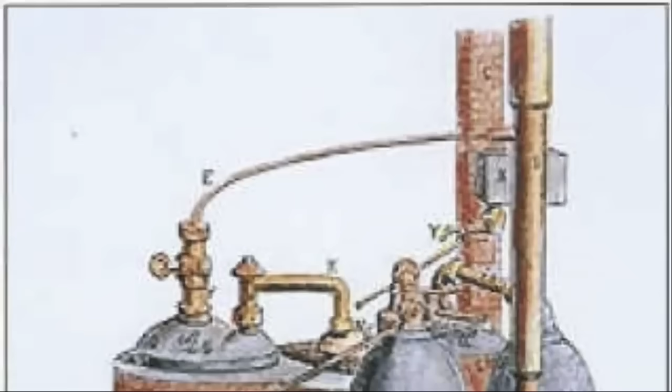The first commercial steam-powered device is generally considered to be Thomas Savery's steam pump, which he invented in 1698. In 1702, Savery wrote of an engine which will raise as much water as two horses working together at one time in such a work can do. By 1712, Thomas Newcomen had created a steam engine that could transmit continuous power. Both of these early designs were primarily used to pump water from mines.

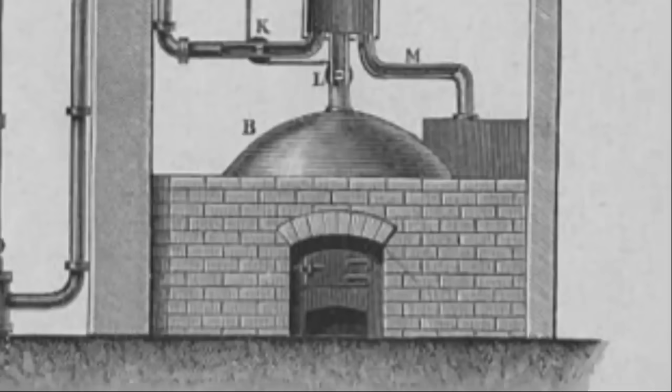The Newcomen engine was significantly more powerful and replaced a team of 500 horses that had been used to pump water out of a mine. It would take decades, however, for these machines to be considerably improved. In 1759, the Newcomen engine came to the attention of James Watt, a Scottish inventor and mechanical engineer who had made a living fixing and making scientific and musical instruments in Glasgow, Scotland.

Watt was born in 1736, and though sickly as a child, showed an aptitude for math. He learned to repair and make instruments like sextants, compasses, and barometers. He found employment at the University of Glasgow. He also started a business building musical instruments and toys.

There is a popular story that Watt was inspired to investigate steam after seeing a kettle boil and steam lift the kettle's lid. The story has been told in a variety of forms, none of which are probably strictly true. Still, while he was not inspired by a boiling kettle, he did conduct many laboratory experiments that did include the use of a kettle to create steam. Watt came to understand the rules of thermodynamics, a field that would not be formalized for another century.

A friend seems to have brought the steam engine to his attention when he suggested that a steam engine could be used to drive a wagon, replacing horses. It was in repairing a University of Glasgow model Newcomen engine in 1763 or 1764, however, that he came upon a better system that could significantly increase the engine's efficiency.

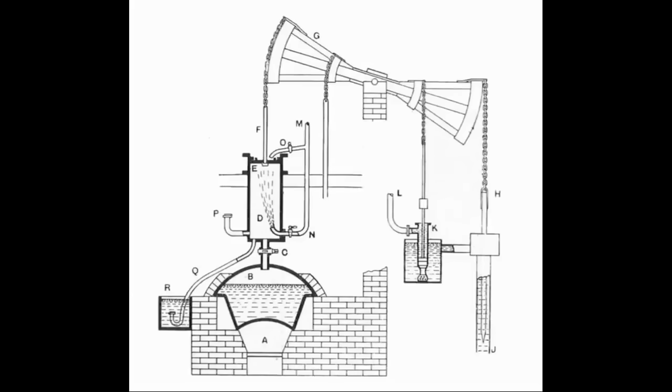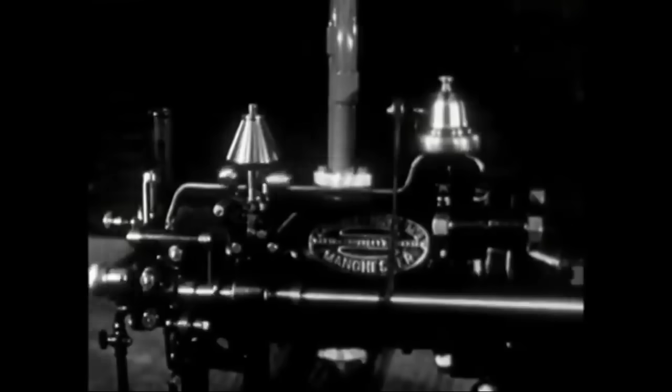The Newcomen engine had a single piston that was alternately heated and then cooled, which wasted a significant portion of the machine's potential. His innovation was to add a separate chamber he called a condenser, in which steam could condense, which massively improved efficiency. Later, he was also able to make another significant innovation by using a sun and planet gear system to allow his engines to make rotary motions, allowing steam engines to spin wheels.

Despite his talent for inventing, it took him years to realize any financial gain from his work. His research left him in near poverty, and he spent years in the 1760s borrowing money and working as a civil engineer. At one point, he so despaired of success that he wrote, "Of all things in life, there is nothing more foolish than inventing, and probably the majority of inventors have been led to the same opinion by their own experiences."

By 1768, he had created working models, and in 1769 he received a patent for a newly invented method of lessening the consumption of steam and fuel in fire engines. Also, in 1768, he met with Matthew Boulton, owner of a manufacturing company and leader in the English Enlightenment movement. Boulton had had little formal schooling, but he had become successful as a businessman and scientist anyway, corresponding with Benjamin Franklin and Charles Darwin's grandfather. He bought an interest in the patent, and Watt continued his work.

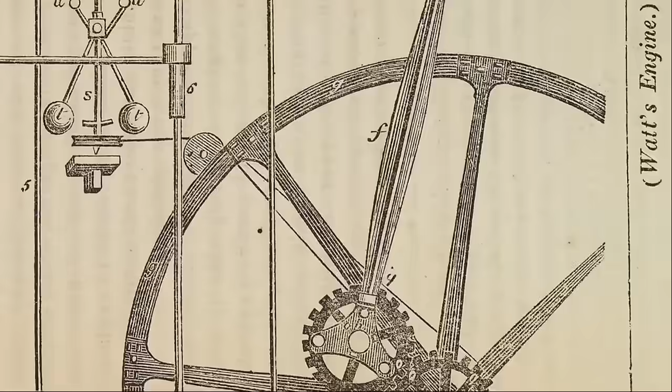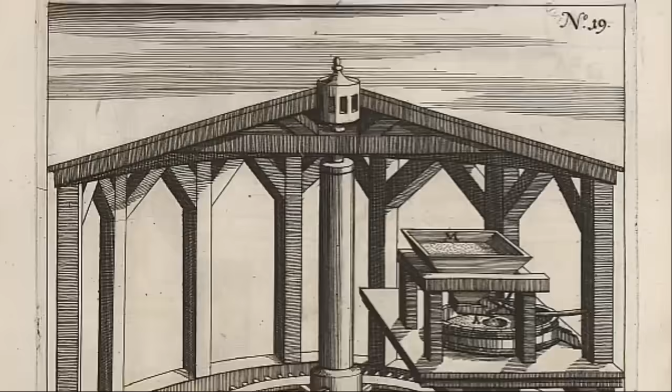Watt was able to introduce his engines commercially in 1776 and agreed to be paid for the machines by taking royalties on 1/3 of customer savings compared to the coal cost of running the Newcomen engines. While this was a profitable system, it didn't work with customers who did not already have steam engines and who used horses instead. Horses were widely used for all kinds of power in the 18th century and earlier, not just for plowing fields and pulling wagons.

Mills, where grain is ground into flour, were important to create bread, a staple food for European society, as well as in creating malt powder for use in brewing. Wind, water, and oxen have all been used to turn mills and grind grain, but the most effective means of running a mill by the late 18th century was the horse.

Samuel Whitbread ran a successful brewery in London and had 6 horses that walked ceaselessly in circles to power the mill. He may have had as many as 20 horses for the mill, which were switched out to keep the mill working at peak efficiency.

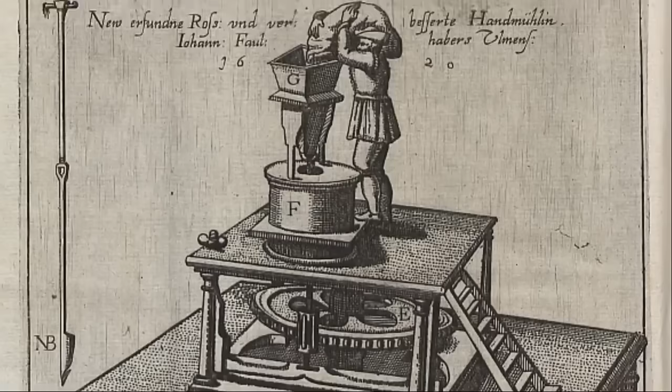It isn't 100% clear how Watt eventually came up with the number that would define horsepower. In one version, Watt, watching horses like Whitbread's, observed them to complete about 144 circuits in an hour, about 2.4 times a minute. He determined that the horses pushed the shafts of the mill with a force of about 180 pounds. Using a complicated formula, he determined that a horse could produce

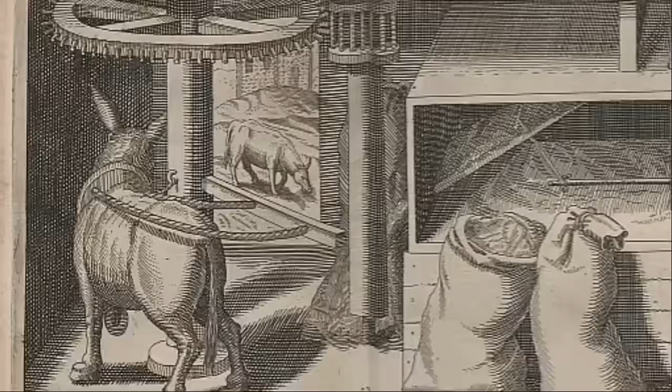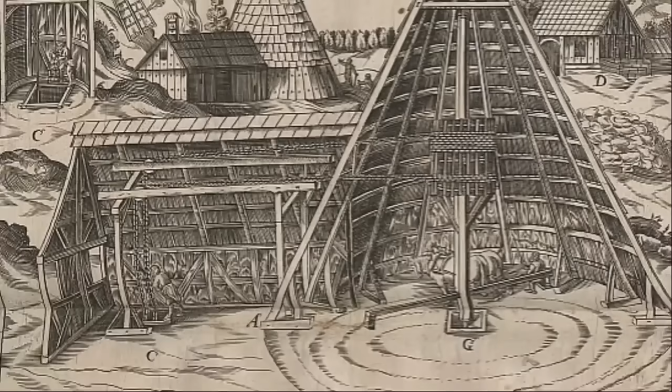32,572 foot-pounds a minute, where a foot-pound is the amount of force it takes to raise a pound a foot in the air. Others had come up with different numbers, but Watt standardized his version of horsepower at 33,000 foot-pounds per minute. That might sound like complete nonsense, but it can be visualized. Imagine a single horse raising a 33-pound bucket from the bottom of a 1,000-foot deep well in 1 minute. The energy it takes to raise that bucket is 1 horsepower.

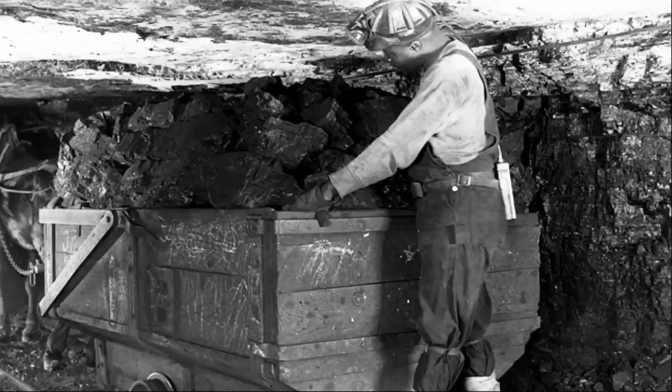One version attributes his calculations to watching the work of pit ponies, which worked to raise coal from mines. He guessed they could lift an average of 220-pound force 100 feet a minute, and he estimated that a full horse would be at least 50% stronger, coming up with a number similar to the 32,572 foot-pounds in a minute of the earlier tale, which was then standardized at 33,000 foot-pounds per minute. Watt may have done both estimations before standardizing the measure, but however he came up with it, his estimation was a tour de force of marketing.

A popular legend for how he came up with this number is that he was challenged by a brewer to build a steam engine that could match the work of a horse. The brewer established the amount by putting his strongest horse to work for 8 hours, driving him all the time to the limit of his endurance.

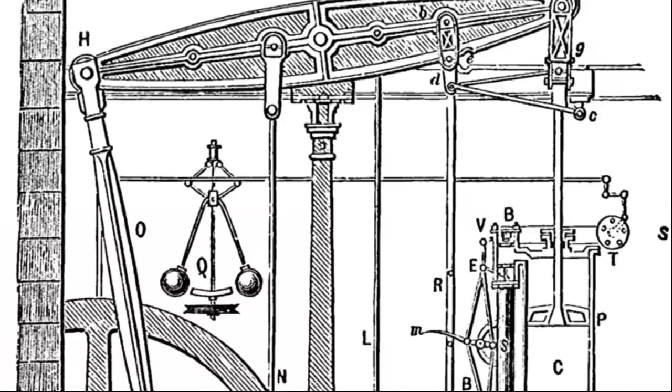Popular Mechanics in 1912 said the 30,000 foot-pounds, that is the amount of force necessary to lift a 30,000-pound weight 1 foot in 1 minute, produced by the horse, exceeds by nearly 1/3 the work capacity of an average horse. But Watt made his engine produce at least 33,000 foot-pounds and dubbed the value a horsepower. This story is likely apocryphal, but it does fairly accurately represent Watt's marketing strategy.

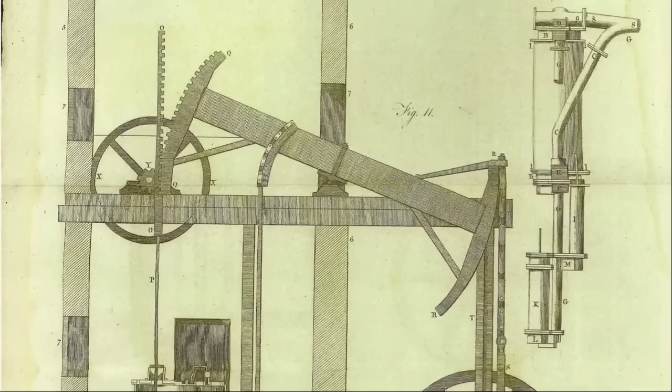He told Whitbread that his engines could harness the power of 200 horses at once without having to store or feed the animals. Whitbread took the bait, and within a year it increased production from 90,000 barrels to 143,000. The replacement of horses and mills with steam engines was a turning point in the Industrial Revolution. Earlier steam engines like Newcomen's pump were limited in where and how they could be produced, but Watt's engines could be used nearly anywhere, thus providing an immense source of power to countless industries and massively increasing human production.

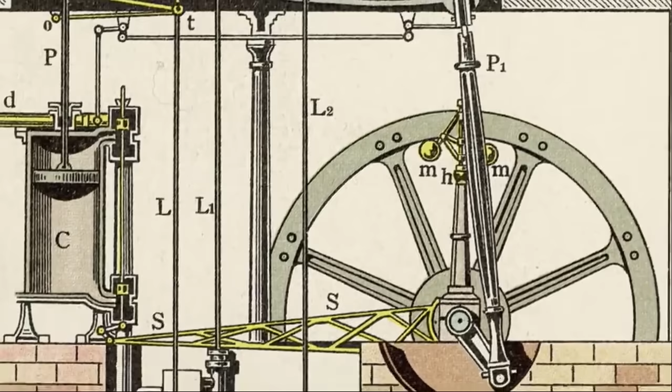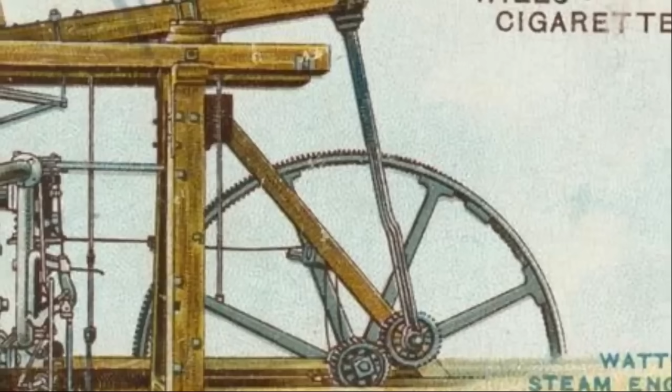The engine installed in Whitbread's brewery on Chiswell Street was installed in 1785, only the second steam engine installed in a brewery. It could produce around 35 horsepower, and it helped Whitbread become the largest brewer in the country. In addition to Watt's success in naming the horsepower, King George III and Queen Charlotte visited the brewery and the machine on May 24, 1787.

Astoundingly, that steam engine still exists, even though it's moved far from its original home. It was only actually decommissioned in 1887, 102 years after its installation. Archibald Liversidge, an English chemist and a trustee at what was then called the Technological, Industrial and Sanitary Museum in Sydney, Australia, intervened before the engine could be scrapped and had it donated to the museum. The museum, which is now called the Powerhouse Museum, still displays the engine. It is the oldest surviving rotative steam engine still in existence.

Watt's steam engine and his work with Boulton catapulted him into an internationally famed inventor. His patent made him a wealthy man and allowed him to play a significant part in England's technological revolution. He created a number of other inventions, including a portable copying machine. In the 1790s, some of his clients stopped paying him as other separate condenser steam engines came to market, and they thought that his patent would be impossible to defend, so he spent considerable time in court fighting other inventors.

He retired in 1800, built a magnificent house he called the Heathfield, and spent the last years of his life tinkering with inventions like a machine for copying sculptures and traveling the world. He died on August 25, 1819.

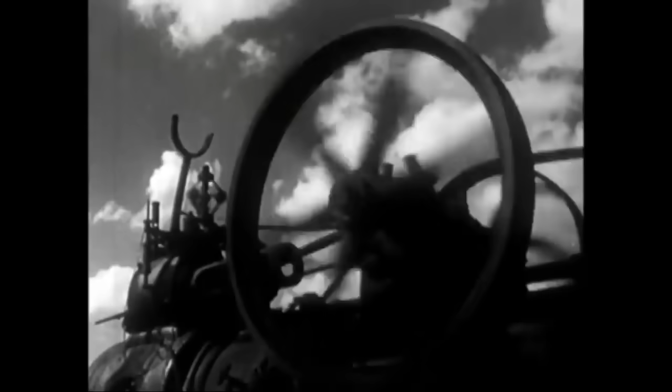His inventions and improvements on the steam engine were epoch-changing, providing a significant foundation for further inventions, and he has a claim to being one of the fathers of the industrial age, as his work helped power many of the innovations that transformed the world over the 19th century.

In 1882, Charles William Siemens first suggested using the name watt to apply to a unit of power. It's now familiar to many as the output of a very different invention, the light bulb. Despite his somewhat imprecise measurement of horsepower, the term caught on, becoming a standard way of talking about the output of power of engines throughout the 19th century.

There are actually differing measurements for a horsepower as well. A mechanical horsepower is the number familiar to many in the US and elsewhere. It uses the standard measurement and the output and performance of vehicle engines. But there's also a metric horsepower which differs slightly. While mechanical horsepower is the equivalent to about 745 watts, a metric horsepower is equal to about 735.

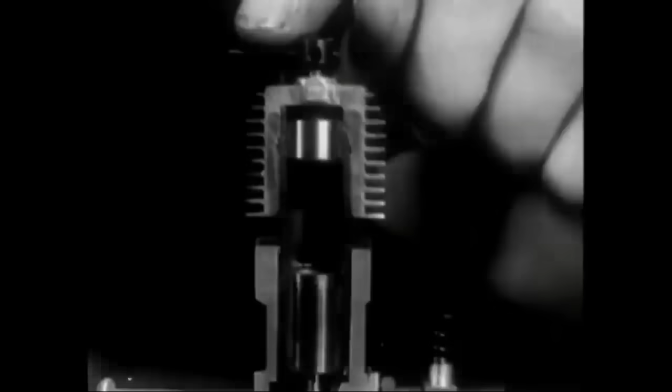Of course, now we are pretty far removed from a time when a horse was the most recognizable symbol of working power. But we can be reminded of those early days every time we work with something that has an engine, from cars to lawnmowers. James Watt had an enormous impact on the world when he developed his engine, and that impact would have been important even if he'd never come up with the stroke of marketing genius of that term, horsepower. And yet, come up with that stroke of genius, he did.

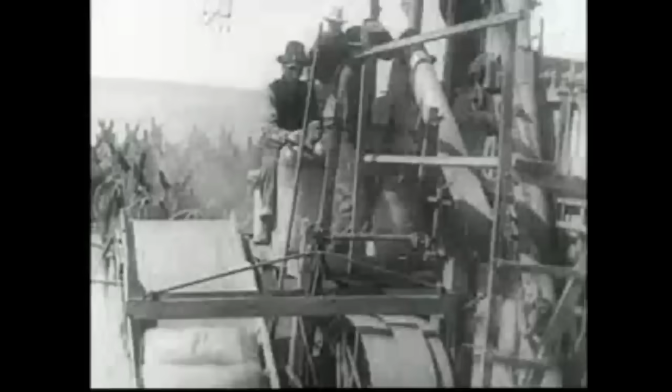The term became so standard that the very first advertisement for a Model T boasted that the car has 20 horsepower. It's also interesting to note that while the number of horsepower given for most vehicles reflects peak horsepower, most horses can produce much more than 1 horsepower for brief periods. A 1993 study, based on measurements made in 1926, found that the horse's peak power reached as high as 14.9 horsepower, but that for sustained activity, a rate of about 1 horsepower fits with how 18th and 19th century people used horses.

For James Watt, the engine that he built and the term that he coined created a legacy that lasted far beyond his lifespan and is still visible today. All you have to do to see it is to, well, pop the hood. His statue in Westminster Abbey has an epitaph which says that Watt enlarged the resources of his country, increased the power of man, and rose to an eminent spot among the most illustrious followers of science and real benefactors of the world.

The word plastic is derived from the Greek word for to form or shape. And the term really predates the stuff that we call modern plastics. It's been used as early as the 16th century to refer to any compound that was, say, moldable or shapeable. But it is a particularly apt term for modern plastics, which can apparently be shaped into almost anything, and because of that have been shaped into, well, almost everything.

We have a very mixed relationship with plastic. The term itself has come to mean fake or cheap, and plastic trash in the environment has become an issue of international concern. But plastic is so related to our modern life, so pervasive, that plastic is practically the definition of modernity. And that material, which can be shaped into almost everything, has shaped us as well, almost from the very beginning. The story of celluloid, the first man-made plastic, is history that deserves to be remembered.

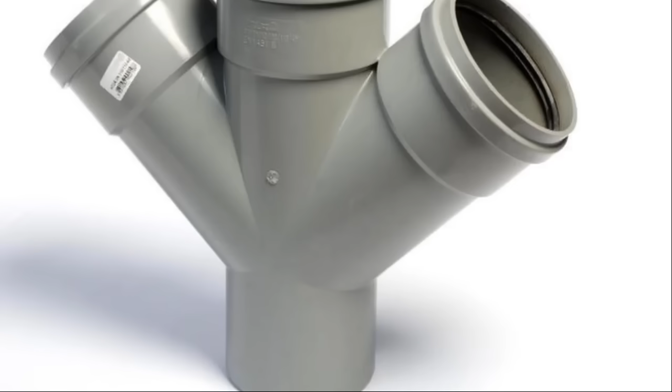Plasticity is a general property of materials that refers to the ability of that material to undergo deformation without breaking. Soil has plasticity, that's why you can leave a footprint. Metal has plasticity, that's why it can be bent. The materials we call plastics have such high plasticity, ability to form them into new shapes, that they become named after the ability. Plastic is moldable polymer.

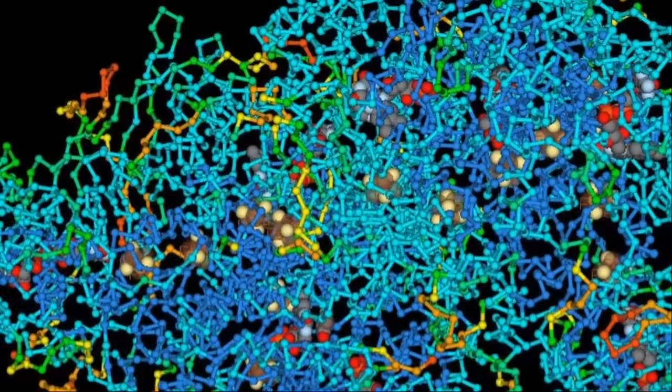While we think of plastic as the epitome of fake and not naturally derived, the building blocks of plastic are not just rooted in nature, they are fundamental to it. Polymers are so-called macromolecules, very large molecules made up of repeating chains of smaller molecules. The smaller molecules, called monomers, join together in a process called polymerization to create three-dimensional structures that can include thousands of molecules, for example, proteins.

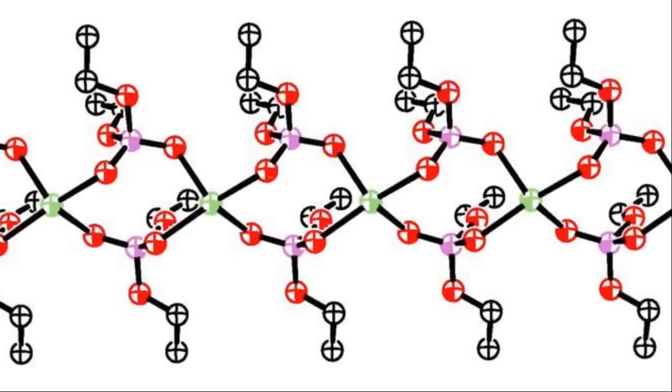Typically, though not exclusively, the backbone of polymers will be carbon, which is strong and stable and well suited to forming molecular bonds. Today we create many forms of artificial polymers, but natural polymers, biopolymers, are central to life itself.

Polynucleotides are polymers—that's the stuff we call DNA. These large molecular masses, compared to smaller molecular compounds, exhibit certain characteristics. They tend to be tough, having an ability to absorb energy by plastically deforming rather than fracturing. They tend to form glass or semicrystalline structures rather than crystals. They also tend toward viscoelasticity, showing characteristics of both viscosity and elasticity—roughly, the ability to deform under pressure and yet return to an original form.

To get the idea, natural rubber is a biopolymer, as are natural gums like chicle. So are wool, silk, and resins like amber and shellac. All of these biopolymers exhibit some characteristics of the stuff we today call plastic.

Humans have been using biopolymers in their natural form for a very long time. There's evidence that people have been chewing gum made of tree resin since the Stone Age. Mesoamericans were using natural tree rubber to make balls since at least the 2nd millennium BC. A process for making silk textiles was developed in China in the 4th millennium BC, and wool textiles date back to at least 1500 BC. There's written evidence of the use of shellac, a natural resin secreted by a bug that can be dissolved into liquid, reshaped, and hardened again, in the 1st millennium BC.

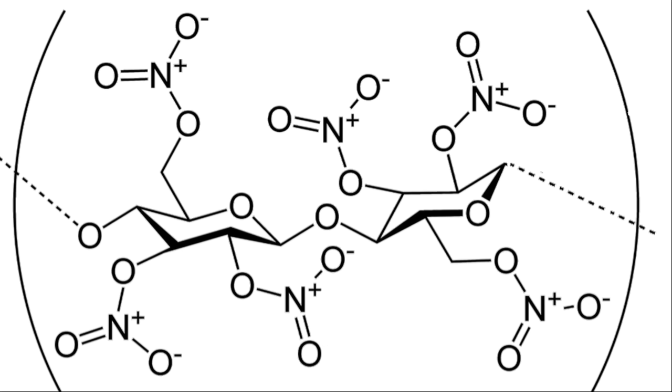Cellulose was also the foundation of the first man-made plastic. In the 1830s, it was discovered that cellulose could be nitrated—that is, have a chemical nitro group introduced into the compound—generally by mixing cellulose with nitric acid. The resulting compound, nitrocellulose, was highly combustible. Its first use was as an explosive, commonly called gun cotton.

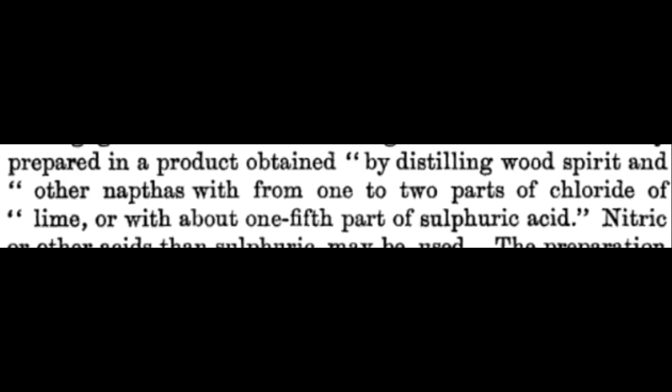Gun cotton can be very volatile, and the first attempts to manufacture it were abandoned because the factories tended to blow up. Gun cotton itself has an interesting history. A prolific inventor from Birmingham named Alexander Parkes found a unique use for it. Parks took gun cotton and dissolved it in various solvents, finding it turned into a viscous substance that could be poured into a mold. His first thought was to make waterproof cloth, but it turned out the compound, which he called Parkesine, could be molded into almost anything.

Parkes took out his first related patent in 1855. He later won a bronze medal for excellence of product at the International Exhibition in London in 1862, exhibiting things like buttons, handles for knives and razors, and decorative cases for daguerreotypes. Parkesine is generally recognized as the first man-made plastic.

But Parkesine didn't quite change the world. Parks tried to commercialize his product and formed a company in 1866. The problem was that Parks wanted to keep the price very low—the idea being that parksine could substitute for all manner of natural materials, with the advantage of being cheap to produce. But in trying to keep it cheap, he used substandard materials and wasn't able to manufacture items of the same quality produced for the Crystal Palace exposition. Parkesine turned out to be prone to cracking and highly flammable. His company folded in 1868.

What took Parks' invention to the next step was a shortage. The game of billiards likely derived from various lawn sports, and French King Louis XI had the first known indoor billiard table made in the 15th century. The sport became popular among the wealthy, and by the 18th century had become more common in places like Paris cafes. The balls could be made of wood or clay, but the wealthy preferred ivory.

The game had grown in popularity, and by the middle of the 19th century was popular enough in the United States—virtually every estate or mansion was expected to have a billiards table—that there was growing concern about the cost and availability of ivory to meet demand for billiard balls. A New York Times article in 1867 worried that 3,500 pachyderms had been sold from the island of Ceylon in just 3 years to make billiard balls. The paper worried the supply of animals might eventually be used up.

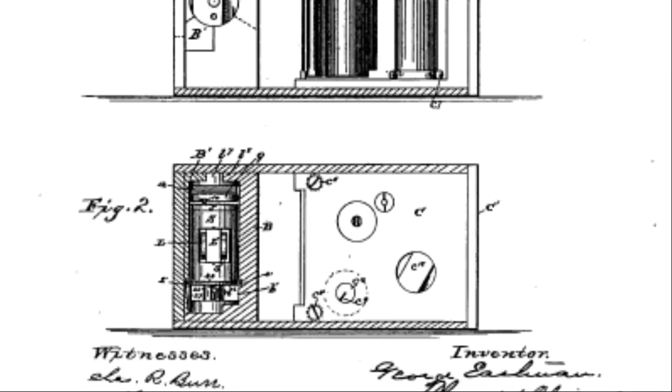At the same time, George Eastman developed a practical roll film to be used in personal cameras, creating the Eastman Kodak Company. Goodwin and Eastman would sue each other over patents, but celluloid had allowed both affordable personal photography and practical motion pictures. Both transformed culture in profound ways.

As an odd demonstration of the power of celluloid, in the 19-teens, early film star Irene Castle became so popular on film that her hairstyle, the short bob, became so popular that it caused a collapse in the market for one of celluloid's most popular products, the personal comb.

Facing a reduced market, one manufacturer of celluloid women's hair products shifted to a new line. Using the newly developed process of injection molding, Sam Foster started producing celluloid sunglasses, first from a Woolworth store on the boardwalk in Atlantic City under the brand name Foster Grant. The popularity of celluloid film drove the development of inexpensive celluloid sunglasses, which largely featured movie stars in their marketing.

The relationship between humanity and plastic is something that author Susan Freinkel describes as a toxic love affair. Celluloid created a revolution that led to the development of all sorts of different kinds of plastics to make virtually everything. And it's not just consumer items that we get from plastic.

It led to huge advancements in science and technology. Could we have ever gone to the moon? Could we go to outer space if we didn't have plastic? And it allowed us to stop taking the things we need directly from nature. Elephants might be extinct today if it weren't for John Wesley Hyatt.

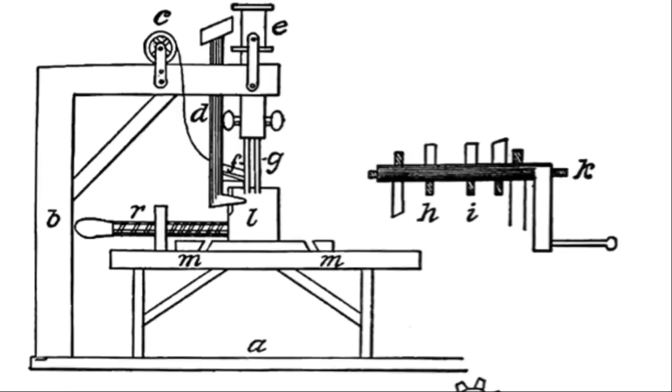But while needles have been a tool for humankind for millennia, a machine that can replicate the human motion of the needle is a relatively new invention. The first design for a sewing machine is generally accepted to be in 1790, when Thomas Saint, a cabinet maker in England, designed and detailed a machine intended for use on leather and canvas.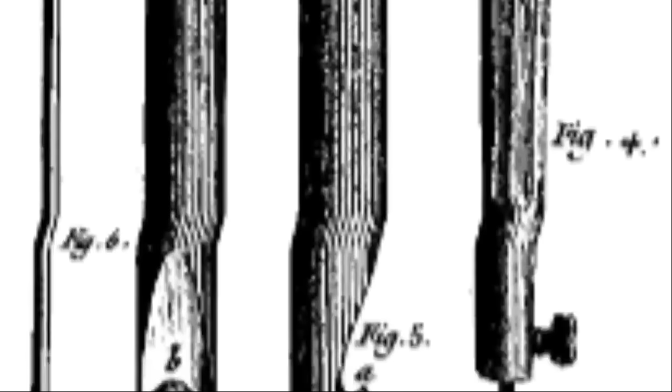The machine used a chain stitch, in which a series of loop stitches form a chain-like pattern. The process uses two points: a stitching awl that pierces the material, and a forked point rod that would carry the thread through the hole where it was hooked underneath.

But Saint never appeared to market his design. It was never produced or used in any large numbers. It's assumed that he probably had at least one working device, but no original examples exist. In 1874, an engineer was able to replicate the design using those original patent drawings.

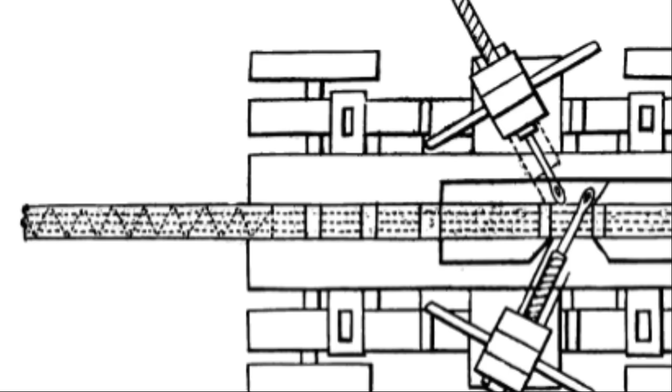While several machines were patented in the early part of the 19th century, either the designs failed or were not successfully marketed. Josef Madersperger, an Austrian tailor, was granted a patent in 1814 for a machine he created to recreate the motions of the human hand while sewing. He never marketed the design, and the patent expired three years later. He died in the poorhouse in Vienna, never having had any success.

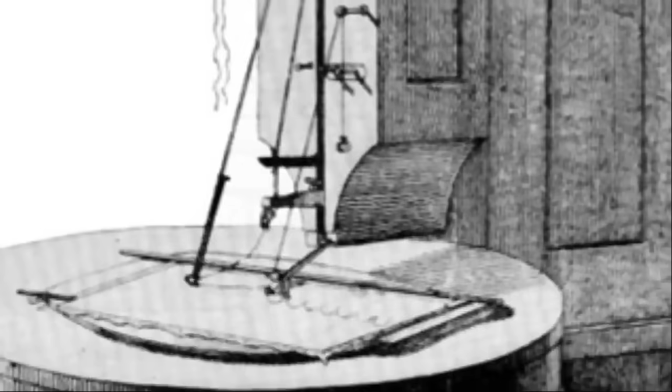The first practical machine to see wide-scale use was created in 1829 by a tailor named Barthélemy Thimonnier, who recruited Auguste Ferrand, an engineer, to help with patent drawings. Their patent was granted by the French government in July of 1830.

Thimonnier successfully negotiated a contract with France for the manufacture of army uniforms and opened the first machine-based sewing factory with 80 machines. However, his factory was burned in an act of arson, allegedly by a group of tailors who feared their jobs would be replaced by the invention. Thimonnier was inside when the fire began, but escaped with his life. But just as others before him, his machine never fully caught on, and he died in poverty.

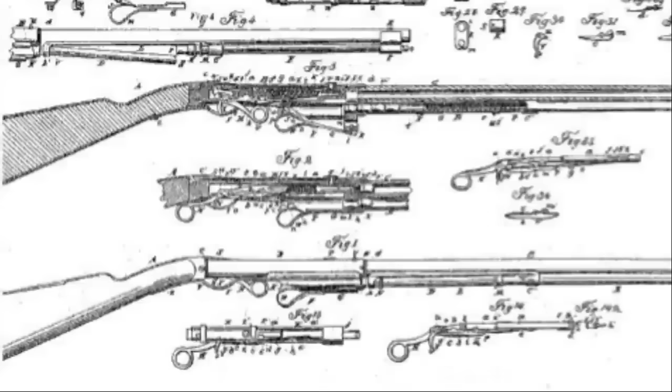In 1832, an American mechanic and inventor named Walter Hunt devised a working sewing machine, but concerned with the welfare and success of seamstresses and tailors, decided against filing the patent. Hunt did, however, go on to patent the safety pin, the fountain pen, a streetcar bell, a coal-fired stove, an ice boat, an ice plow, a street sweeping machine, and an early repeating rifle design.

But it wasn't until 1844 that all these elements came together to create a truly practical machine, and that came from Englishman John Fisher, who in 1844 patented a machine for making lace that was very much like one created by Isaac Singer in 1851. Importantly, though, while Fisher's device earned a patent, that patent was apparently either lost or misfiled by the Patent Office.

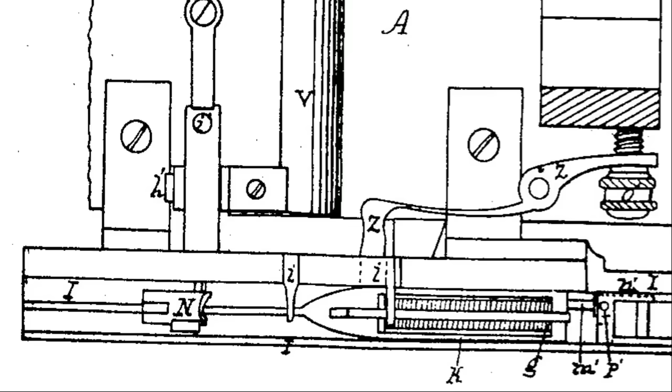Next was Elias Howe Jr. in Massachusetts. He had been an apprentice in a textile factory and later in the shop of a master mechanic, where he latched onto the concept of making a sewing machine. In 1846, his machine was the first to be patented with a lock-stitch design and a needle with an eye at the point, powered by a hand crank.

Howe spent a great deal of money on improvements and marketing, but after failing to find investors in the United States, his brother marketed the machine in London. There, William Thomas, a factory owner, purchased one for £250. Howe then traveled to London to further design in conjunction with Thomas, but after business disagreements and the failing health of his wife, returned to the United States.

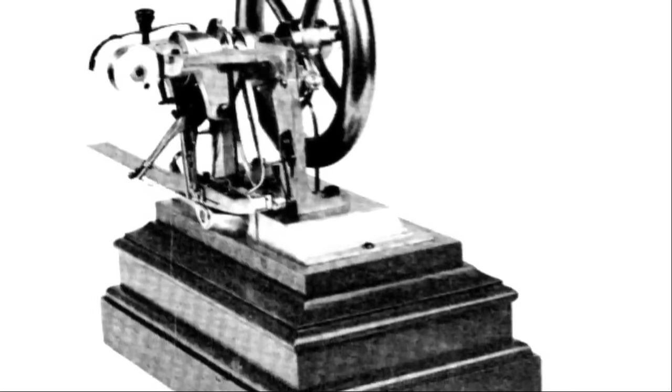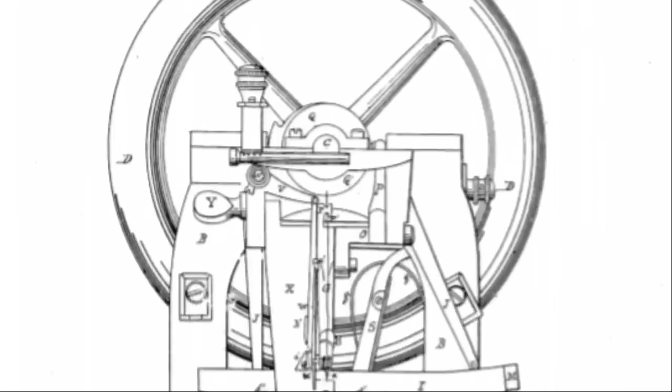He was penniless, not even able to afford the steerage to get home. On board the ship, he served as cook to earn his way, and soon afterwards became a widower. It was learned that the sewing machine had proliferated with various patents for minor differences, but he was unable to afford the court cases in defense of his own patent.

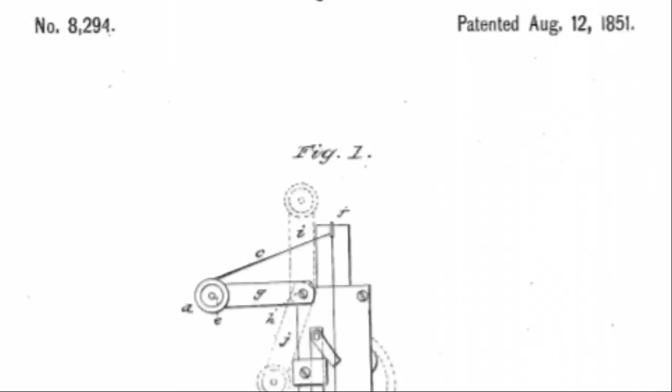Shortly after the death of Howe's wife, an American inventor named Isaac Singer was working in a machine shop in Boston where sewing machines designed by a pair named Blodgett and Lerow were being repaired. The shop owner asked Singer if he could improve the machine because it was cumbersome to make and utilize. Singer's improvements—a straight needle instead of a curved one, and a linear shuttle instead of a circular one—were memorialized in his patent number 8294 in August of 1851.

But it was about this time that Howe started borrowing money from friends and family in order to pursue court cases against all the companies manufacturing machines in violation of his patent, including Singer. Singer tried to argue that Howe's design was not original because Walter Hunt had invented the machine previous to that, but since Hunt had never filed for his patent, Howe won the dispute and earned the right to royalties on all lock-stitch machines that used eye-pointed needles.

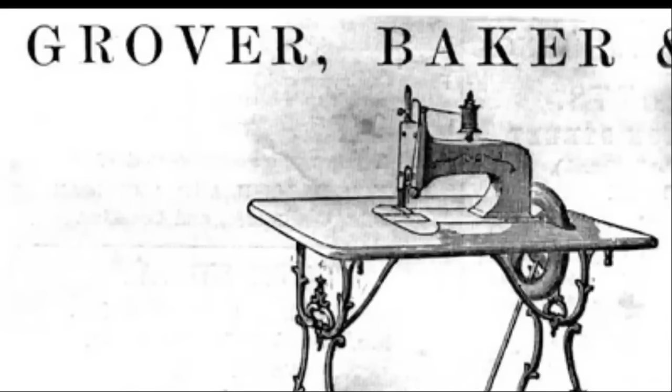Originally, the royalties were $25 per machine. With the sewing machine adapting and improving so rapidly, many other patent holders pursued legal cases in what has often been called the sewing machine war. In October of 1856, the president of one sewing machine company, Grover and Baker, proposed a sort of legal truce.

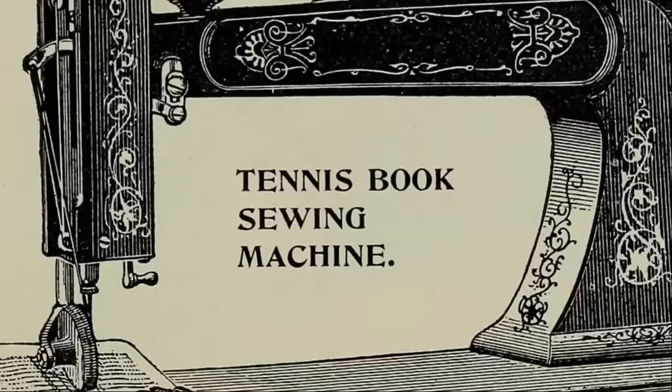He worked with several manufacturers, including Singer, Wheeler and Wilson, and Elias Howe, to form the Sewing Machine Combination, or Sewing Machine Trust. The group pooled their patents and agreed to share the profits, with Howe getting a reduced royalty of $5 per machine sold in the United States and $1 for every machine sold abroad. This agreement allowed manufacturers to concentrate on production and sales, not legal action.

It ended in 1877, when the last patent expired. Because Howe was paid per machine, his royalty records allow us to know just how quickly sewing machine production grew. In 1853, Wheeler and Wilson produced just shy of 800 machines. By 1859, the number was 21,000, with the total for the 7 years being almost 34,000 sewing machines. Singer produced slightly more than 800 machines in 1853, and about 11,000 in 1859, with a 7-year total of over 23,000. In 1860, 110,000 machines were made in the United States.

In 1860, the New York Times chimed, 'Such are some of the important results accomplished by the sewing machines, these Lilliputian needle women that never become weary while performing the labor of human fingers. Every day extends their use into remoter parts of the country and of the world. They are used in China, in Hindustan, Australia, Turkey, Africa, South America, and throughout Europe. In fact, everywhere that busy needle is plied, these tireless workers have found their way, carrying relief for women's trembling hands and weary eyes. The swift-flying needle, the best boon to a woman in the 19th century, has already won many victories, and soon the song of the shirt will be heard only in tradition of sufferings passed away.'

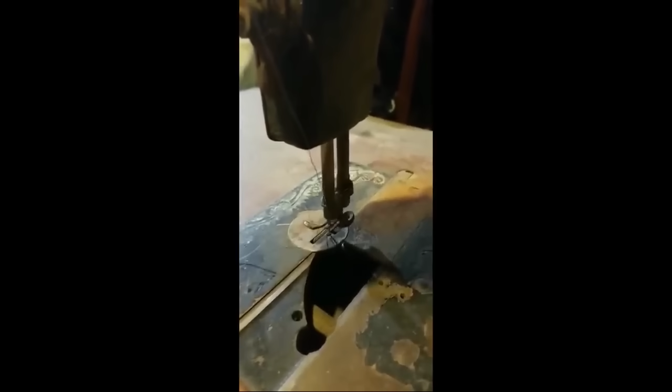But in all this growth, one company stood out and is still a household name today. Singer, despite having to pay royalties, built a flourishing business. He invested in mass production with interchangeable parts, making his machines less expensive to produce, and introduced a smaller machine intended for home use. Edward Clark, Singer's attorney and part owner of the company, launched the concept of installment payments, or hire purchase plans. This allowed the machine to be used for income while still paying off the purchase.

According to one article, Singer said, 'I don't care a damn for the invention. The dimes are what I'm after.' And he made many dimes. At the time of his death in 1875, his company was one of the first American-based companies to be multinational and was profiting some $22 million a year. According to American Science and Invention, Singer was the first to spend more than $1 million on advertising. The company's website currently claims that it produced the first practical sewing machine and that by 1890, the company had 90% of the global market share.

Isaac Singer and Elias Howe both died multimillionaires, and the sewing machine went on to impact society in other ways. Firstly, the industrialized garment industry allowed for cheaper clothing, allowing the purchase of new clothing instead of repairing worn ones. This freed up time otherwise spent creating or maintaining a family's clothing. Prior to sewing machines, the amount of time it took an experienced seamstress to create a gentleman's dress shirt by hand was 14 hours. A frock coat would take 16, and a pair of pantaloons took 5. With a sewing machine, the time was drastically reduced to between 1 and 3 hours per item.

The change allowed women to seek employment outside the home. The machine also transformed industry. More clothing could be produced more cheaply, and the increased income for more workers increased demand. The garment industry grew, along with ancillary industries like growing cotton, manufacturing machines and parts, and department stores to sell the products. With the new industry, however, came new challenges of industrialization.

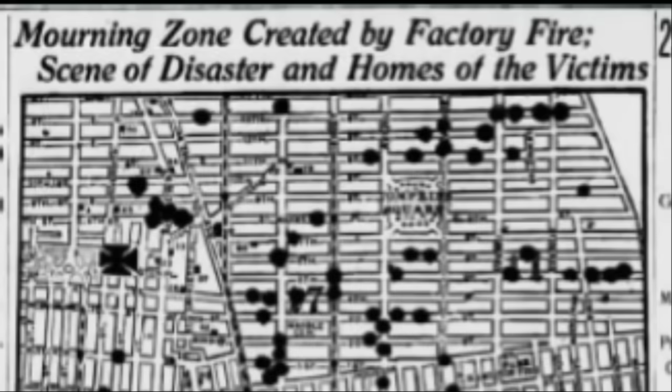Adding insult to injury, the exits were locked to prevent employees from sneaking breaks or stealing clothing. The managers could check purses since all employees exited through one set of doors. And with the fire blocking the only open stairwell, many resorted to jumping from the windows to escape the flames. The death toll that day was 146 garment workers, only 23 of whom were men.

The tragedy of that day led to many legislative reforms and creation of new organizations. The American Society of Safety Professionals was formed to help create industry standards for occupational safety and health. New York State Legislature formed the Factory Investigating Commission to prevent hazards and loss of life. Their investigations led to the creation of 38 new labor laws in New York.

The impact of the invention of the sewing machine was truly profound. It changed economies, it changed industries, it changed women's roles in industry, it changed the way that we regulate industry, but it also powerfully impacted culture. Things like department stores and advertising and consumer culture were powerfully impacted by sewing machines, which were among the first industrialized items to be marketed directly towards women.

The introduction of electric sewing machines, which were first available in 1889 but became much more available after the First World War, was part of what spurred the demand to have electricity in homes. With factories spewing out clothing, fashions changed much more quickly, and clothing didn't have to last as long, and new stores were created or stores were transformed. Entire industries were transformed in order to showcase those fashions.

In other industries, like interior design, think about things like drapes or furniture, or the interior of automobiles were also revolutionized by the invention. According to Time magazine, Mahatma Gandhi, who was a man famous for simplicity, said that the sewing machine is one of the few useful things ever to have been invented.

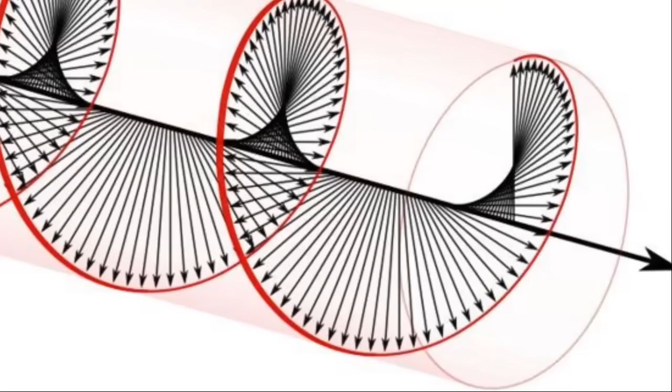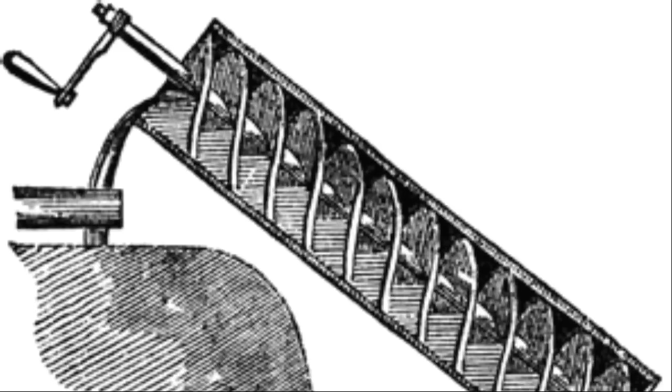The idea of the screw, that is an inclined plane that spirals around a central shaft, is ancient. The earliest known uses were a water pump that might have been invented in Assyria to irrigate the Hanging Gardens of Babylon, one of the 7 wonders of the ancient world, in the first millennium BC. The device was in use in Egypt at least by the 3rd century BC, when the Greek mathematician and engineer Archimedes of Syracuse saw and described one. The device was later incorrectly attributed to Archimedes and is commonly called the Archimedes screw.

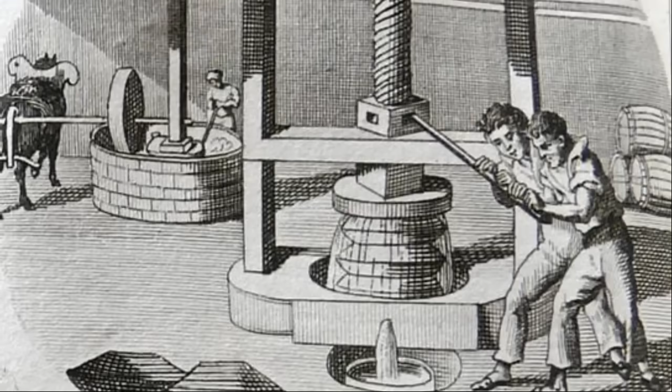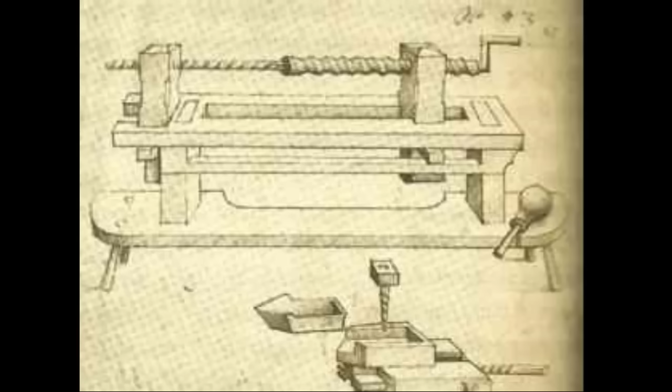Screws were also used, at least since the Hellenistic period, to drive presses for, say, pressing olive oil or pressing grapes for wine. But screws were not used as fasteners like we use them today. Without industrial methods, they simply would have been far too expensive to make. A number of other methods, including dovetails and dowels, were used in fastening, as well as, of course, the much more easily produced nail. Screws as fasteners were not apparently produced until around the 15th century. The earliest known mention is in a late 15th century manuscript.

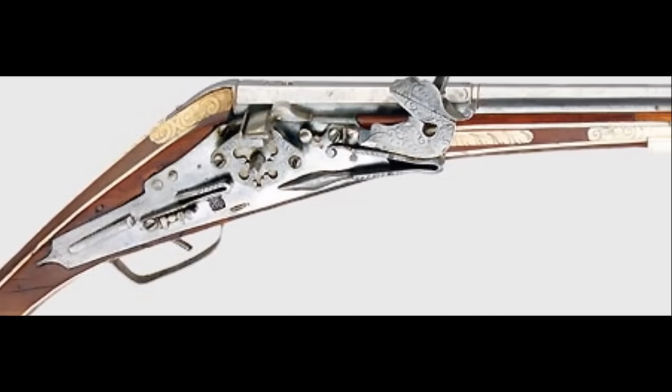Their initial use was as a fastener for parts of medieval jousting armor and, in nearly the same period, for early firearms. The wheel lock uses an internal spring to drive a piece of iron against a piece of pyrite to produce a spark to light the powder. The pyrite wore out quickly and so had to be replaced often, and a screw was thus used, since it could easily be screwed in and out.

The earliest screwdrivers were built to service these weapons, and they were called either a screw turner or a turn screw, and they had a pear-shaped wooden handle, and otherwise looked a lot like a modern flat-headed screwdriver. But these screws and screwdrivers would have been custom-made and used on very expensive devices like wheel locks and jousting armor, and so screws were not for the common folk.

In 1760, brothers Job and William Wyatt of Staffordshire patented a screw-making machine that used a file to cut in the threads following the pitch of a lead screw. This allowed mass production of screws and was a precursor to industrial mass production machines.

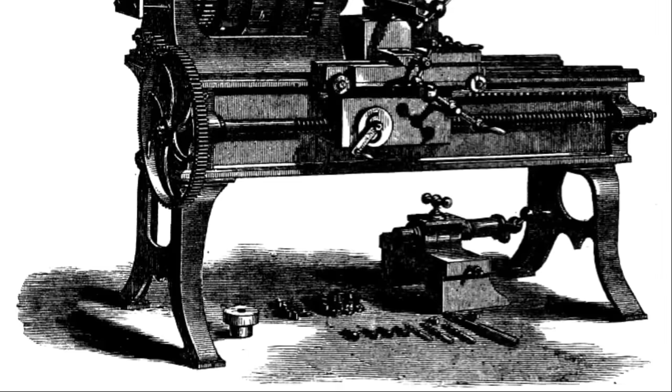The idea of using a lathe of some sort to cut threads was variously improved upon until a process for cold rolling threads was perfected in the 1880s. But virtually all of these screws used just a few turning methods, either a hexagon or square that was turned externally, or a flat slot cut to turn internally.

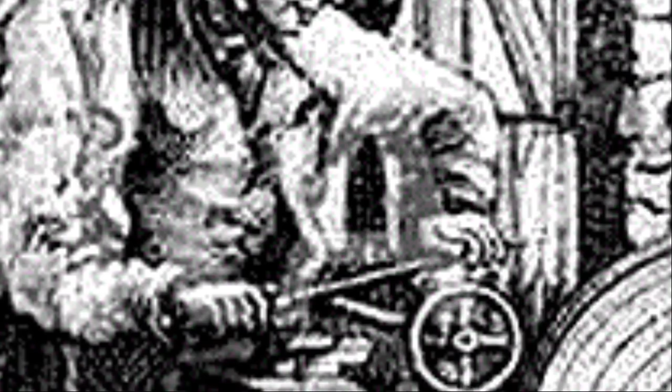And as anyone who has ever used one knows, flat-headed screws and screwdrivers have their problems. There were many alternatives proposed and even patented in the latter half of the 19th century, but most were not easily manufactured, and slotted screws still prevailed. But solutions were on the horizon.

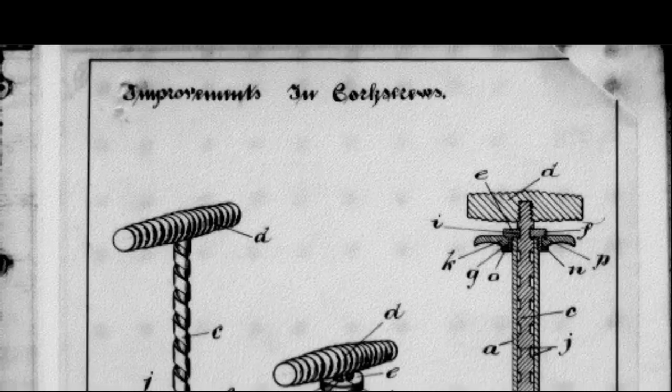Peter L. Robertson was born in Haldimand County, Ontario, Canada in 1879. A tinkerer, Robertson produced a number of inventions, including a new design for cufflinks and even a better mousetrap. In 1905, he received a patent in Canada for a new design of a corkscrew that centered itself on the bottle.

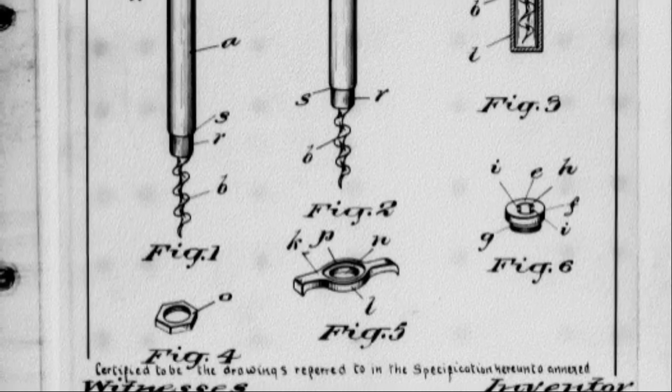Around the turn of the century, Robertson was working through eastern Canada as what was called a high-pitch man, meaning a traveling salesman for a Philadelphia tool company. High-pitch men would sell their wares, say, on a street corner at a county fair, calling out their wares. And among the things that he was selling was a device of his own design.

Robertson's 20th century wrench brace was a multi-tool that could be used as a monkey wrench, as a brace, as a bench vise, as a screwdriver, and as a rivet maker. And he called it the greatest tool on earth. And if all that sounds impressive, there were actually several multi-tools that were very similar, patented in that era.

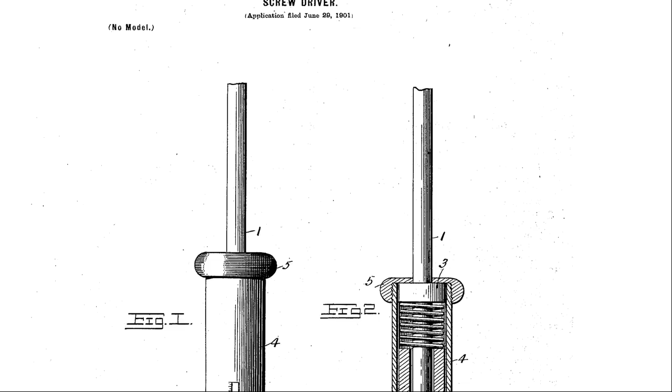But it was in demonstrating another tool, a spring-loaded screwdriver, that gave Robertson his most famous idea. While demonstrating the screwdriver, which was flat-bladed, the blade slipped and seriously cut his hand. That gave him the idea of a new type of screwdriver head that was less likely to slip or cam out. This is not a new concept.

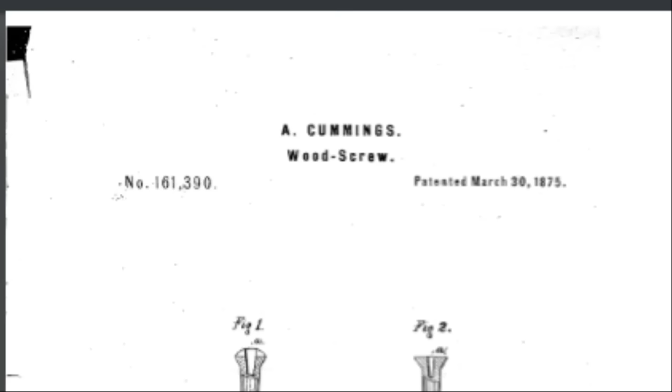There was a great variety of new screw-head designs patented in the latter half of the 19th century, but most never went anywhere, largely because of difficulties in manufacturing, but also because virtually everyone already owned a flat-headed screwdriver. In fact, the basis of Robertson's idea, a square-headed screw and driver, was not new. In 1875, Allen Cummings of New York City had been granted a patent for a screw that used a cavity, either a square or triangle, rather than a slot, to address the same problem.

Cummings' description noted, "It is well known that the ordinary screw head provided with a slot is very susceptible to injury, caused mainly by the slipping of the screwdriver from the slot when the screw is being set home in wood or metal. By omitting the usual slot and using the proper shaped cavity and screwdriver, perfect safety is ensured to the metallic cap." But Cummings' design had a flaw.

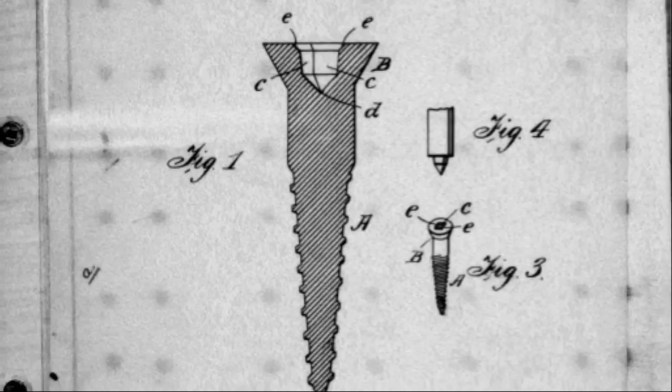The way that you made the cavity that the screwdriver fit into was by stamping it with a die, and stamping it deeply enough that the screwdriver would set inside it would deform or weaken the screw head. Robertson had a better solution, for which he applied for a patent in 1907. His screw tapered the sides of the square gradually down to a pyramid shape. This not only prevented the head from being deformed, but actually helped align the metal grain, as he explained, knitting the atoms together for greater strength.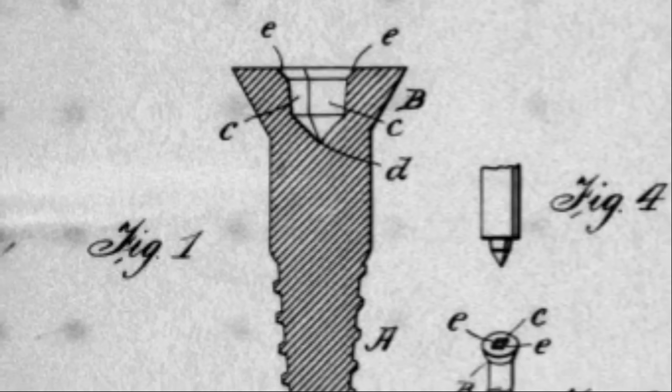It had the added advantage of less waste, since the slot of a slot-headed screw was usually cut out, losing a bit of metal and weakening the head of the screw. Because it was less likely to cam out, you could use more torque with the Robertson screw and driver. As it was self-centering, it could be used with one hand, whereas a slotted screwdriver usually required two.

The head of the screw was less likely to deform, and the Robertson screwdriver was much better able to still remove the screw if it did. It also worked better than a slotted screw if the screw had been painted over. Robertson's screw and driver were particularly attractive to furniture makers and boat builders, where it was more of a problem if a flathead screw cammed out because it would damage the material around it, damage the value of the product.

But perhaps best of all is that Robertson's screw could be cold formed. That is, because the stamp tapered down inside the screw, that meant that you could build the screw without ever having to heat the metal. Cummings' design, as ingenious as it was, probably was never made during its patent life because the screw simply couldn't be easily manufactured. But Robertson's design could be cheaply manufactured, in the millions.

Calling his invention the biggest little invention of the 20th century so far, Robertson gained enough investors to open the P.L. Robertson Manufacturing Company Limited in 1908. He built a factory in Milton, Ontario, which gave him tax breaks and a $10,000 loan. The patent was approved February 1909, and by then the company was already filling orders. Robertson was just 30 years old.

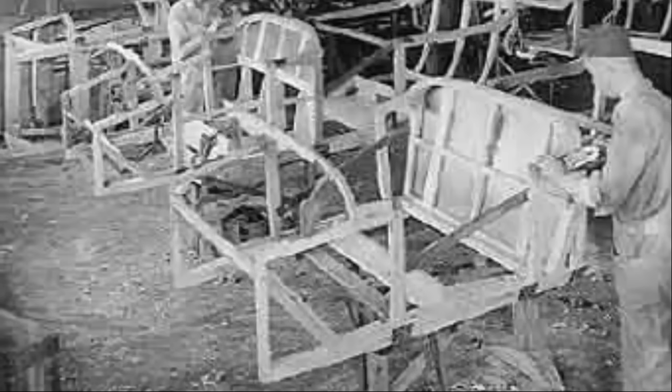While the Robertson Company described the initial years as hard, with local competitors even challenging their patent, the Robertson screw slowly gained adherents among boat builders and furniture makers. In 1913, Fisher Auto Body opened a factory in Walkerville, Ontario, making wooden parts for the Ford Model T. The Robertson screw offered a great advantage for manufacturing, and Fisher became one of Robertson's largest customers, using some 700 screws per body. Robertson later designed a screw for metal to use on the all-metal body of the Ford Model A.

Having been awarded international patents, Robertson saw the opportunity to expand abroad, and so he went to Gillingham, England, and established a company called the Recess Screw Company. He marketed to British industry using the slogan, "The screw that grips the driver." But his real plan was to manufacture screws in England, but sell them in Germany and Russia, and the First World War and the Russian Revolution foiled his plan.

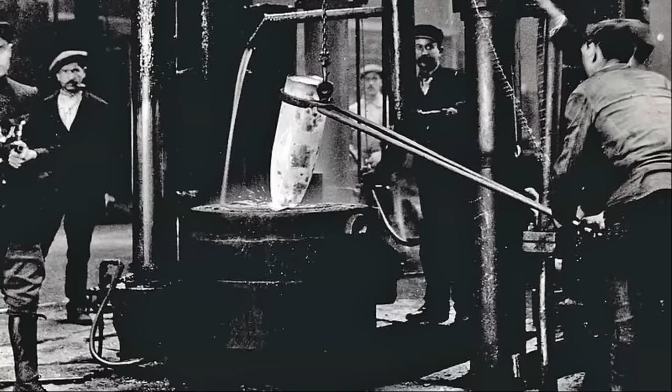Recess Screws turned to war production during the Great War and produced things like firing needles and hand grenade pins, but after the war, Recess Screws failed. There seems to have been several factors involved, including a glut of supply following the war and the actions of some unscrupulous investors, but Robertson resigned as the director of the company.

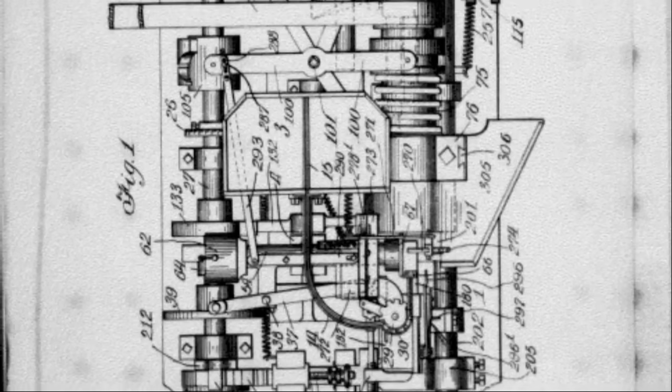But the company in Canada was still doing well, and Robertson looked to expand into the United States. He attempted to negotiate a deal with a manufacturer in Buffalo, New York, but the company wanted a say in manufacturing decisions. And Robertson, perhaps stung by his experience in England, refused to give up that control.

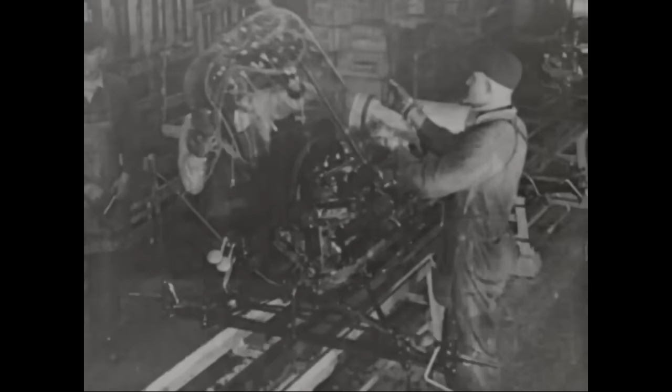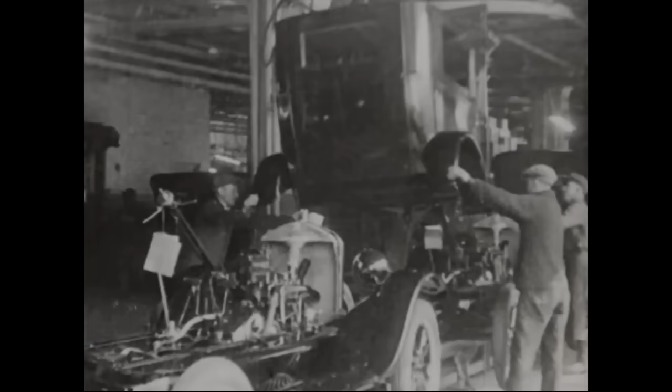Then Henry Ford came to the table. An analysis had shown that the use of Robertson screws in the Ford plants in Canada had saved $2.60 a car, a significant savings for a car that retailed for only $390 and which was being produced in the millions. Ford wanted to use Robertson screws in all his U.S. plants. But Ford wanted a say in production and an exclusive contract, and Robertson stubbornly refused to give up that control. When the deal fell through, Robertson not only did not get the contract for the American Ford plants, but lost the contracts in Canada, almost a third of his business.

After 3 failed tries, Robertson decided to never try to license his screws outside of Canada again, but his marketing skills made his screws and drivers the screwdrivers of choice in Canada, even though just across the border in the United States, they're hardly known at all.

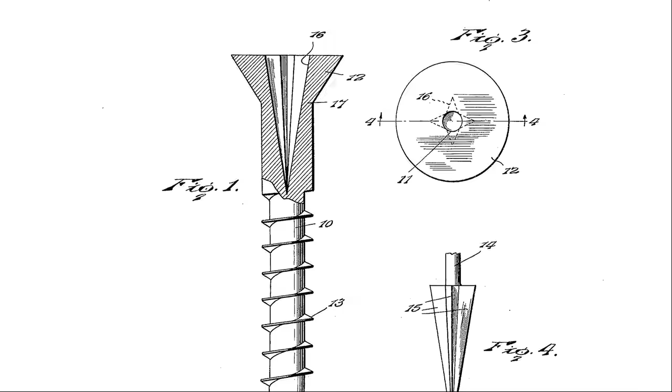But Ford was still using flat screws, which were even more troublesome on automated assembly lines, where if a screw cammed out, it cost time and slowed manufacturing. The solution started with a patent application in 1932 by John P. Thompson, an auto mechanic living in Portland, Oregon. Thompson's new screw design used a cruciform. Like the square-headed screw, this was not a new idea, but again, similarly, previous patents for screws using cruciform heads, as he explained in the application, push the metal ahead of the tool and so disturb the distribution of the metal as to render the screw head extremely fragile.

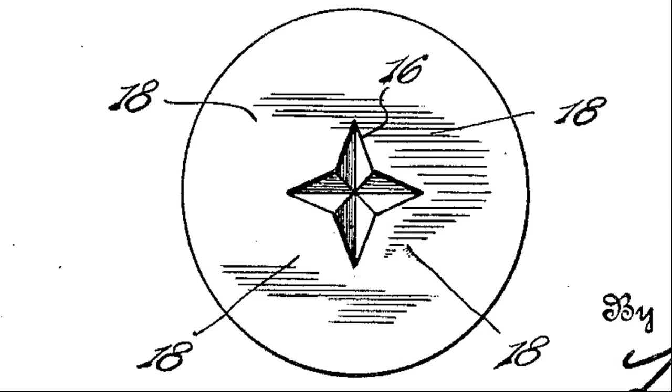Thompson's solution was similar to Robertson's. By tapering the screw head, a star die could be used without distorting the metal, and again, stamping the tapered design made the metal actually stronger. Moreover, by tapering the screw, a driver could be used even if it was not the exact right size, and again, the new cruciform-headed screw would engage with the driver, making it less likely to cam out than a flathead screw. In 1933, when the patent was granted, Thompson assigned it to Henry Frank Phillips.

Like Robertson, Henry Phillips had been a traveling salesman. By the time the patent was assigned to him, he was the managing director of a mining concern, the Oregon Copper Company. It's not really clear why Thompson assigned the patent to Phillips. It might be that Thompson simply couldn't figure out how to sell it or couldn't find investors, but it also might be that he already had an agreement with Phillips when the patent was filed.

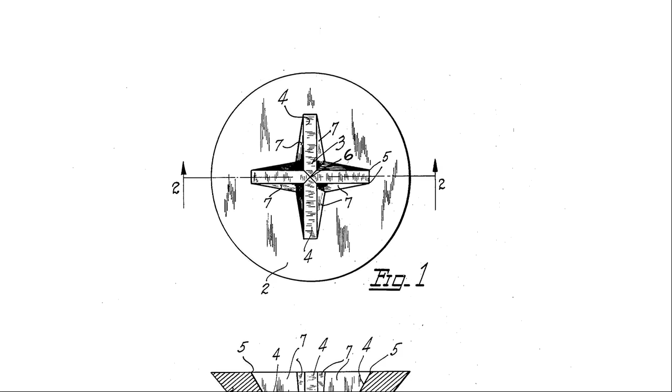But Phillips refined the design and was granted more patents. Unlike Robertson, Phillips did not intend to manufacture screws, but hoped to license the patents to manufacturers and collect royalties. Not surprisingly, with a new invention, Phillips got a lot of rejections from companies who told him the idea lacked promise for commercial success.

Eventually Phillips convinced Eugene E. Clark of the American Screw Company of Providence, Rhode Island, to manufacture the design. By 1934, the screw was available for consumers.

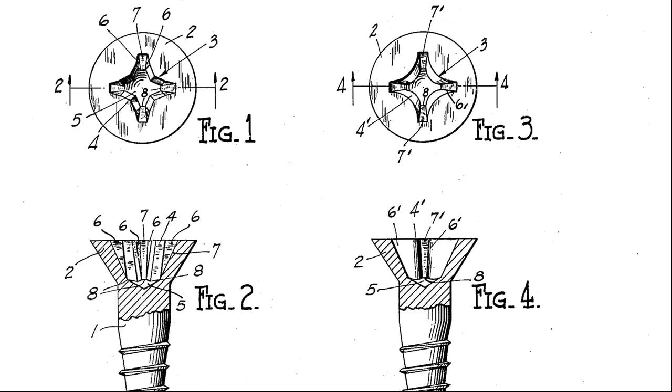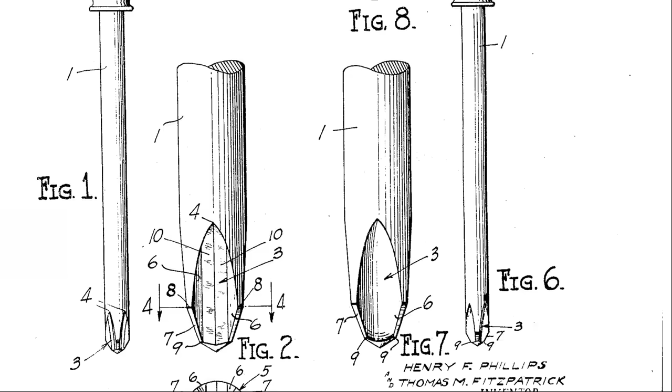While the tendency to cam out could be troublesome for anyone driving screws, it was a particular problem for manufacturing, which even at that time was using power tools. Phillips' later patent application seemed to have recognized the advantage. A 1934 application said, 'Failure of the slotted screw to retain the blade driver, especially in power-driven operations, is not only dangerous to the operator, but is likewise always injurious to the work.' It was clear what market he saw for his design.

In 1936, General Motors was invited to test the design. The Phillips head screw first went into use at GM, making the 1936 Cadillac. The advantages for industries large and small was obvious. Customers raved about the amount of work time saved.

Within just a few years, virtually all U.S. automakers, including Ford, were using Phillips head screws. The airplane manufacturing and railroad industry likewise switched. By 1939, 20 companies had licenses to produce Phillips head screws. By 1940, 85% of U.S. screw manufacturers had a license for the design, and the company grossed more than $1.3 million adjusted dollars.

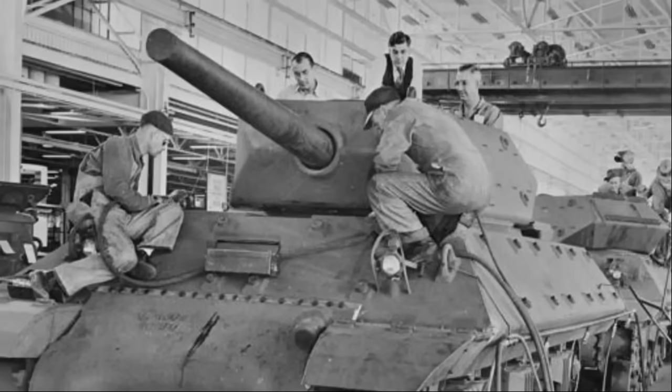While the Second World War limited foreign licenses, it established the Phillips head screw as an industry standard among wartime manufacturers. The hundreds of thousands of planes and motor vehicles built by the U.S. during the war were largely screwed together using Phillips head screws.

By the time Phillips patents expired in the 1960s, there were more than 160 domestic licensees, and half again that number of foreign licenses. While Robertson had Canada, Phillips screws are, by industry estimates, by far the most popular type of screw everywhere else in the world.

There's still a heated debate over which is better, the Robertson screwdriver or the Phillips-headed screwdriver, and that debate has only grown more heated recently as the internet and free trade makes it easier to acquire Robertson screws and drivers outside of Canada. In general, the Robertson screwdriver does grip the screw better, meaning you don't have to use as much pressure to turn the screw without it camming out, and it's less likely to strip the screw, which are both issues that bedevil common users of Phillips-headed screwdrivers.

But that ability to cam out actually offers an advantage for manufacturing. With a Phillips-headed screw, when the machine has set the screw, it will cam out, and that keeps it from overdriving the screw. And as an advantage at home, in a pinch, you can use a flat-headed screwdriver to spin a Phillips-headed screw, and you can't do that with the Robertson screw.

So far, the Phillips head remains supreme pretty much everywhere but Canada, but the Robertson screwdriver has made significant inroads, especially among furniture and boat makers. The discussion has become more convoluted as there are now many more alternatives on the market, some of which are compatible with existing drivers. Its patents for the Phillips head long expired. The Phillips Screw Company today develops and licenses some of those new types of screws and drivers.